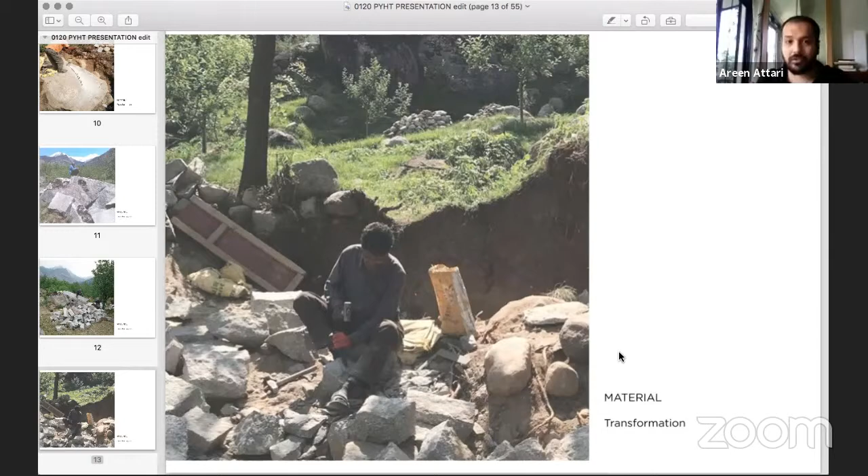So what we did is we actually transformed these stones into something like this. You'll see these chunks, and then they become a little smaller over here, and finally they become building blocks. So we were taking material from the site itself, using whatever we found in that region, in that place, and building with that, right? So we're trying to create a sort of genuine, authentic, and honest architecture that's for that region and from that region.

So these are the kind of discussions we have on site. That's the clients, that's the landowner, and that's me. A lot of times we do a lot of planning, as you can see here, but then we go back and we realize, okay, this is not working on site, and we have to change a few things, or we have to adjust. So the site sometimes talks to us, like the site communicates with us sometimes. Okay, this is not where I want this, or this is where I want that. So you have to listen and you have to be tuned in to these things.

This is a sort of layout of the space. There's 2 rooms here, another 4 rooms here, and you can see this is one big boulder. Where my mouse is right now, it's one big boulder.

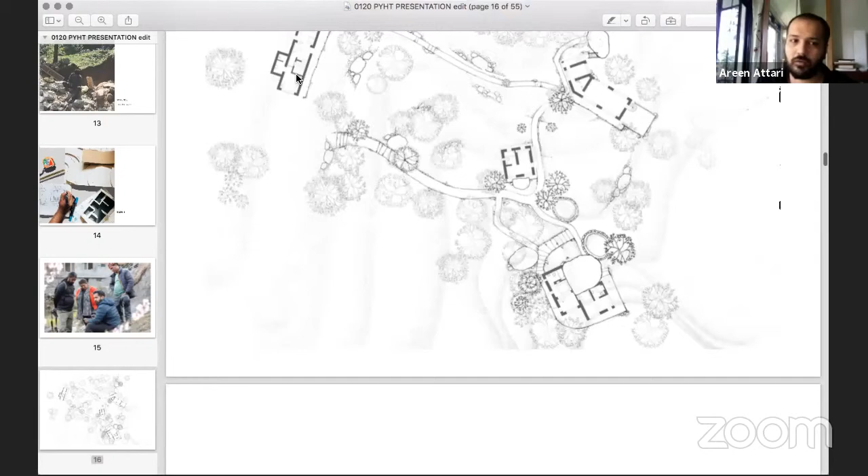So we actually wrapped this structure around this boulder. So instead of walls on this side, we actually have the boulder itself. Okay, and there's a dining hall and a kitchen area here, and the owner's home is out here. So I'm just going to show you a little bit more about how we wrapped around this boulder.

So this is one of the boulders that we did not break down, because the whole idea is to not just go and smash the site completely into pieces, but to do it with responsibility and with a little bit of authenticity. So we retained this huge boulder, and then we tried to keep all the trees as far as possible. Even the smaller ones, I think only 2 of them had to be transplanted because there was really no place to build in, and I think one of them survived and even bore fruit.

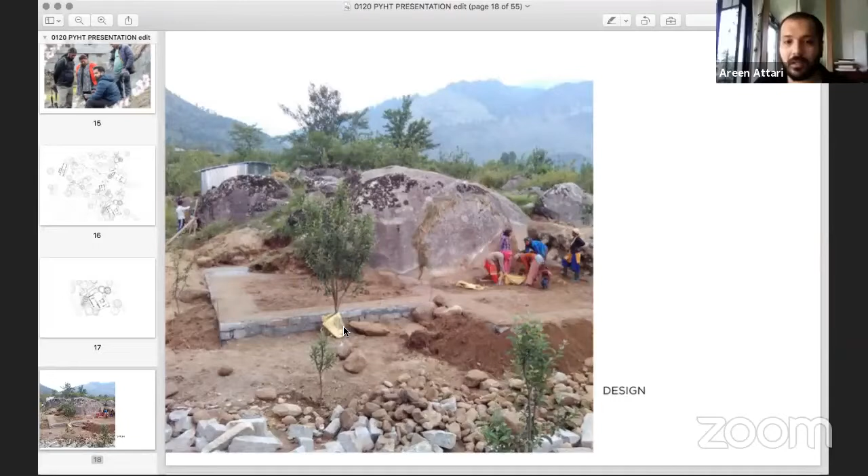So you can see we've gone quite close to this tree, but we took care of the roots, sort of wrapped around this boulder, and now you can see the walls coming up. They're really thick 18-inch stone walls. Okay, so when I say 18 inches, like 1.5 foot of wall that acts as thermal insulation, and so it keeps the cold out and doesn't let the cold come inside.

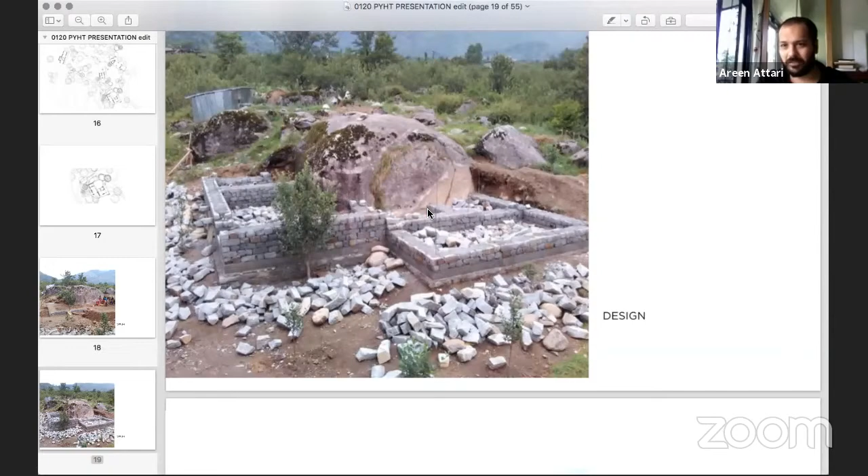And so with this particular boulder, the ground floor was here, and the walls you see of the ground floor are part of this. And then when it came up to the first floor, the top of this boulder acted as the entrance to the first floor. Okay, so we got like a double use from this boulder, and it was the height. So now this is the same structure. So this is like a before and after when the walls have come up.

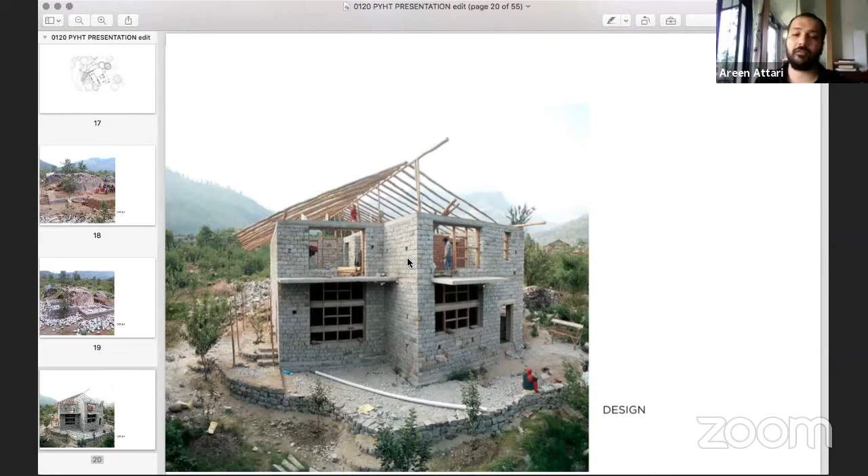And we try and make the most of the climatic conditions. So most of these big openings that you see are facing the south. In the northern hemisphere, the sun goes from east to west via the south, especially in winters. It moves slightly towards the north as we come towards the summer, but in the winters it's quite inclined towards the south. So we try and trap in that heat as far as possible.

Yeah, then this is a little further, the same sort of structure, and now this is it from the other side. Okay, this is the same structure from the other side. This is the entrance, and this is the boulder. So the land is so contoured that we've sort of hidden these spaces in there. So when you're walking towards this, you don't realize that it's ground floor also. It almost feels like, oh, that's a basement. So we try to play along with the existing land, so you don't have to do any cutting and filling of the land. You try and maintain the way it is, try and retain the way it is.

This is another structure. There are two rooms here, the ground and first. And then we try to create these fun things over here. So where my mouse is, this is a small little balcony actually. And the one beside it is also a balcony. They're actually not connected to each other. So this is a balcony for just one person maybe to come and stand, but the access to this balcony is from the bed. Okay, so there's a bed and then there's a window, and you have to climb from the bed into the window, and you can sit on the window and just put your legs out, or you can jump out, and the view is fantastic.

All right, the view is of Rohtang. If you've been to Manali, if you're familiar, it's the northern mountains over there. It's beautiful. And then the balcony on the right, there's actually a door, but that's from the shower. So if you feel like it and if you have some guts, then you open that door while you're having a shower and just enjoy the view. So we try to create these fun things as well.

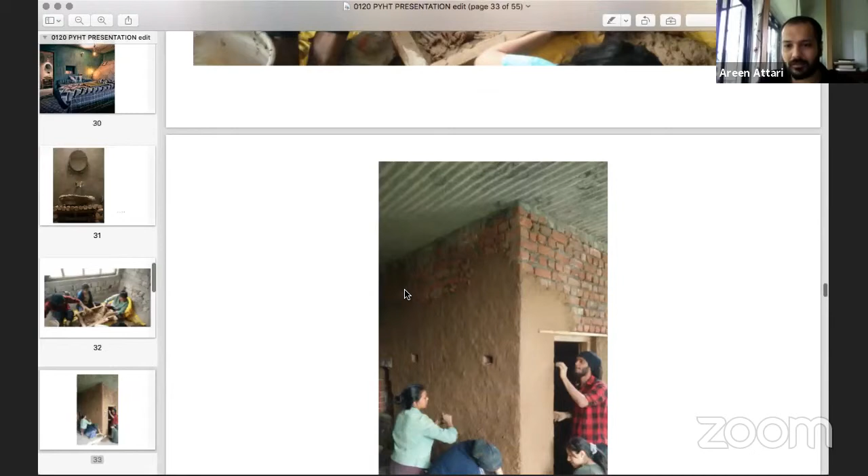We do workshops. What we always try to do is involve the young people who want to learn how to build with their hands. I feel there's a lot of people now who are really tired of the way things are. They want to learn how to build themselves. They at least want to get their hands dirty. So we try and plug in workshops with our existing sites. And so this was a workshop we did on mud plaster. You can see our participants doing mud plaster. And if the workshop is successful, then we leave it as part of the site, and most of it is successful.

And then we made a pizza oven again with mud. It's a technique called cob. So you can see people mixing it and turning the mud, and then you sort of stomp it for a while, and then you make balls like atta, and then you stack them on top of each other with a hollow part in the center, and then you have amazing handmade pizza.

Yeah, we must go to Manali. Okay, so

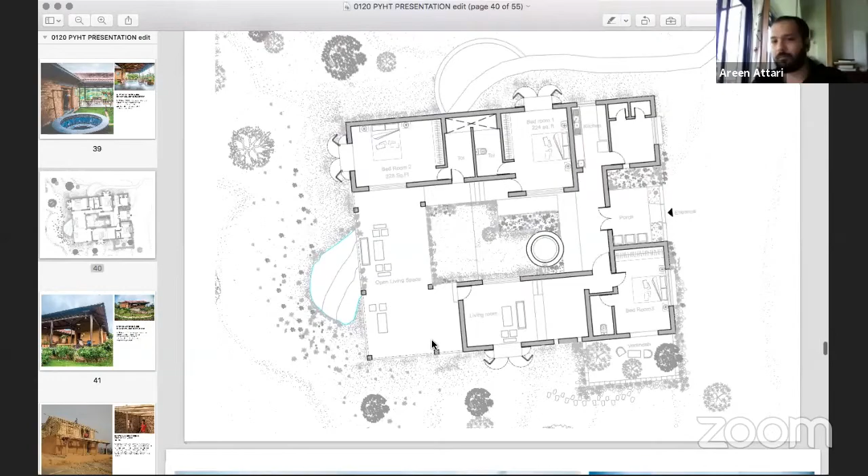Now, a lot of people, when they ask us that you build with mud, they're really worried about flooding, and they say, what about the water? Does it survive? Does it have long durability? I tell them two things. One thing I tell them is that the Great Wall of China, part of it is built in earth. Okay, and it's survived a long time, and you can see it from the moon. So it's a good testament to building with earth.

And the second thing is this project actually, the last monsoon. So the property is very close to the river Bhadra, and last monsoon it rained so much that they had to open some dam, and then overnight this whole place flooded. There were around 6 feet of water, and it stayed for around I think 8 to 12 hours. And we were really scared, right? Because you don't want any floods to happen in any structure, let alone an earth structure. But we were a little worried.

But we had also done something called a wet strength test. We had tested, and we knew that these blocks would last for 2 days without any problem, completely immersed in water. So this structure actually proved that, and there was minimal damage to the walls. In fact, no damage to the walls. There were some electric problems. There was some loose furniture that was all over the place. A lot of trees and crops died, but as an earth building, it survived really, really well. So it sort of breaks the myth that earth buildings are not strong and they cannot last.

The temperature difference in these earth buildings is also phenomenal. So mud, in general, as a material, has a high absorption rate of humidity and a high desorption rate of humidity. So it can absorb fast and also let go fast. And this helps a lot in temperature control. So it could be really, really hot outside, and these nice thick walls provide a fantastic climate difference. We measured once and it was, I think, 7 degrees, and we need to measure it over a longer duration.

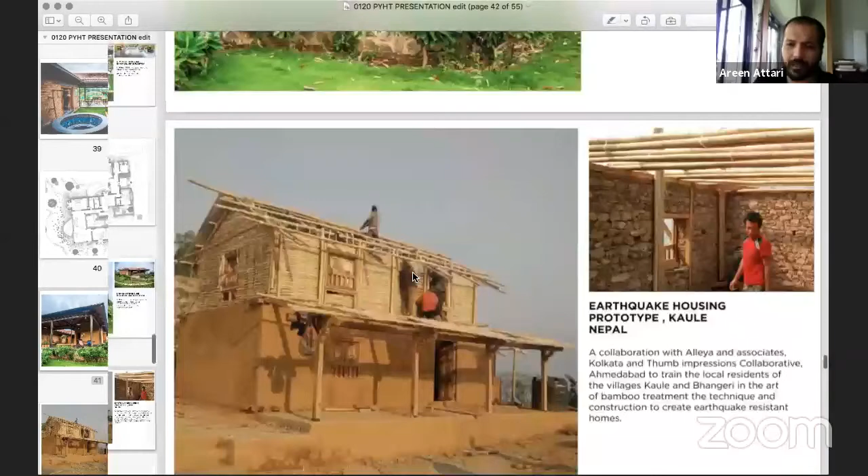I'm sure we'll find a higher temperature differential. And 7 degrees, without any air conditioning. There's no air conditioning, there's just a fan, but even the fan was not on when we measured.

This is one of the projects that we did in Nepal. We did it with two other organizations called Thumb Impressions Collaborative in Ahmedabad and Surat, and Alleya and Associates were the chief architects, and there's architect Sharan Lal. So they were a group of trekkers. They would go with guides from this village, and then they decided that they need to do something for them. So we did a training program over there. We taught them how to build with bamboo, and at the same time we built a prototype out there.

So I spent around 2 months in this village. Fantastic, beautiful people. I was living in a nice village house, eating local food every day, and also the local alcohol is really nice, which they brew themselves.

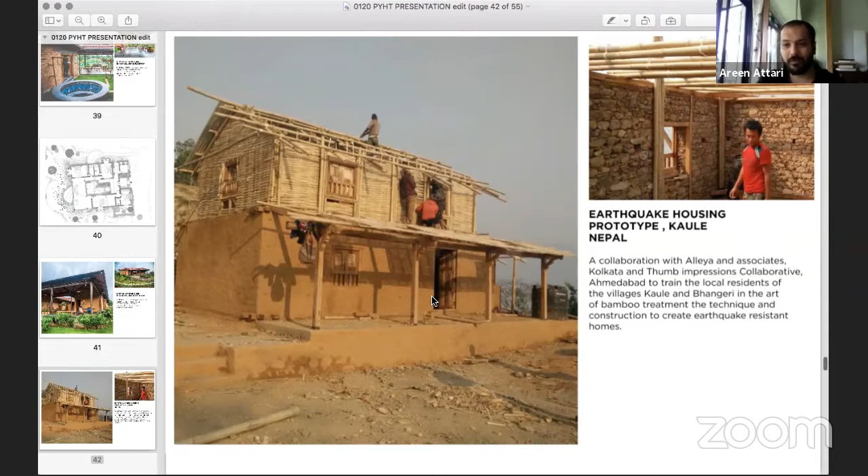And so the bottom half of this building, if you see in this photo over here, is actually the same technique that they use, which is stone and mud mortar. And then we added a few things. So we added these bamboo columns, and then everything above on the first floor is made out of bamboo. Now, bamboo, if you use the correct species, the correct treatment methods, can also last for around 30, 40, 50 years easily with minimum maintenance.

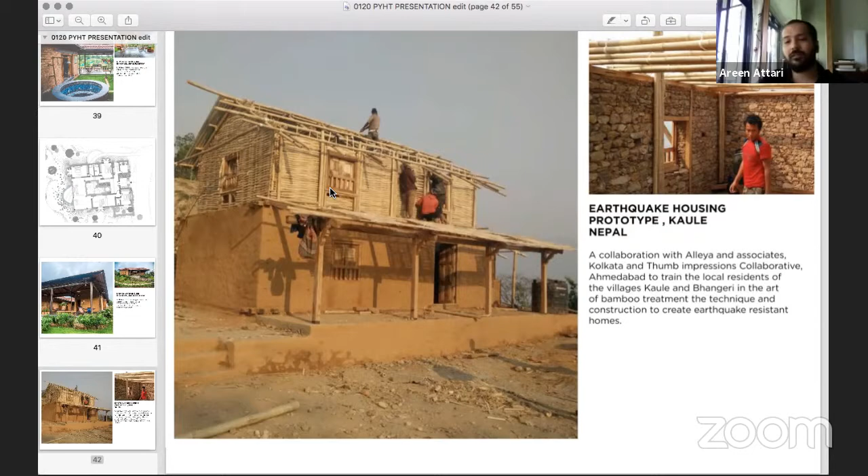So the whole idea for the first floor being bamboo is that it's super lightweight. Even if the bamboo falls, there won't be any fatalities. So it's really, really nice structure. It's also a little flexible, so it helps a lot to resist these movements in an earthquake and sort of stay back in its place.

And we got the whole community there to work on this project. Everyone you see here working, they're women, they're men, they're from the community. We trained some unskilled labor on how to work with bamboo, so they became skilled labor. So you build capacity in that way. So now they can go to places as bamboo craftspersons.

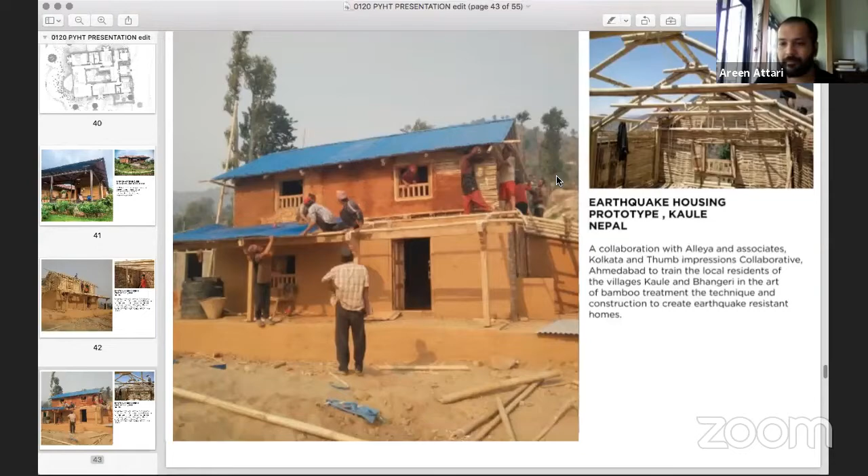Okay, one of our first projects is in a place called Neral. It's in a place called Sagunabag. It's an agro-tourism center. We built this mud house, as they call it there. We call it the adobe house because that's the technique. So adobe is basically sun-dried bricks, not compressed. It's loosely packed bricks that they generally burn to give you the burned brick, but it's not burnt. And we don't use the topsoil. We use subsoil, so it actually doesn't do too much damage to the environment. And then we build it with this raw brick, and again, nice thick walls, excellent thermal comfort.

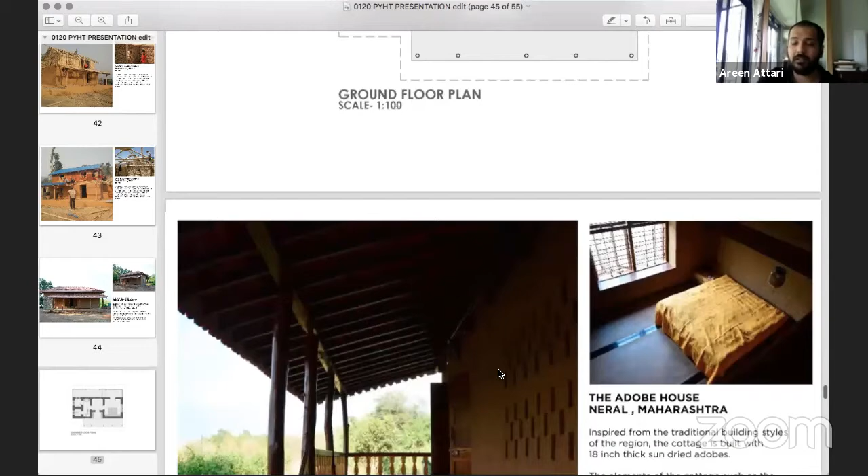This particular house is meant to be a comfortable rural house to get people from the cities to understand what it's like to live in a rural area. And it's overlooking a lovely pond that they've made over there. You can visit it hopefully post Corona times. It's a really nice place actually. You learn a lot about just how agriculture is done. And I think a lot of times we have no idea. We eat all this food, especially people in the city. So it was really nice to do something there.

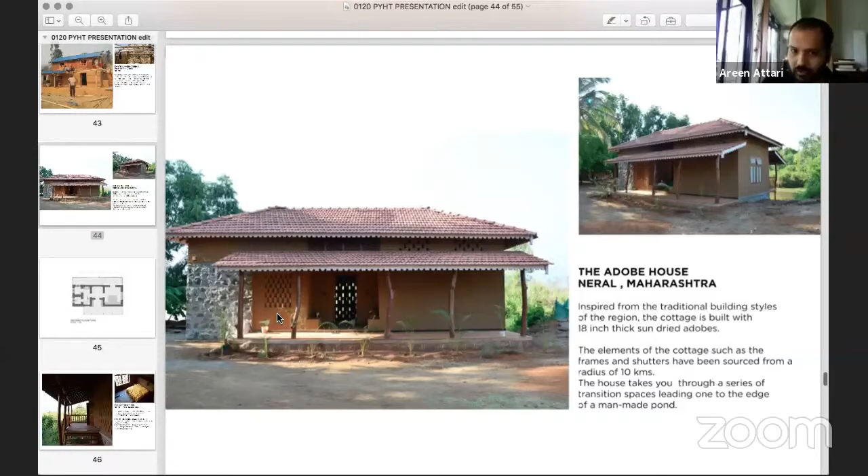Sorry, I'm just going back. All the terracotta tiles on top, Mangalore tiles, they're all recycled. We've put a stone wall in the part where we felt we're going to get most amount of rainfall, from the southwest. It's also our toilet and bathroom blocks. So wherever there's water, we put a stone wall. All the wood that you're seeing here is from their farm itself, grown specifically so that they can use it as timber in construction. The window that you see over here is again an old recycled one that was in their warehouse that we sort of redid. All the flooring over here is terracotta tiles, so we're trying to use all our materials really, really sensitively.

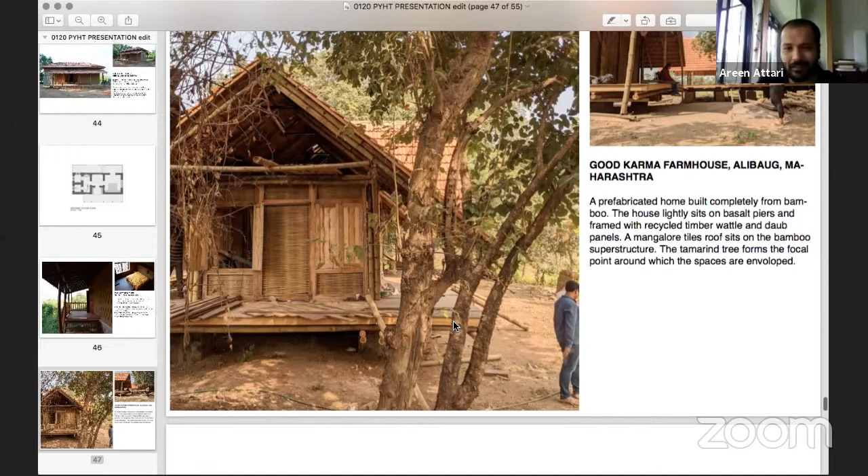And the cyclone just hit this and we were a little concerned about what would happen. We anticipated a few tiles coming off because the bamboo, as I explained before, even in an earthquake zone, can vibrate a lot and resist a lot of these movements, and it'll come back into place. But that vibration may cause a few of the tiles to displace. So we got a photo from our collaborators on site, and it showed that some of these tiles had been lifted off, but that's minimal damage actually. So really, it's a really good thing.

This is how it is from inside. All the wood you see here, on the windows and on the floor, is all recycled from ships. There's one place in Bombay called Darukhana, where they used to break down ships. There's only one shop and one godown, I think, that still exists and still has a lot of this old ship stuff. So we recycle all of that and use it. I don't really know how old these pieces of wood are. They've traveled all over the world, and now they're part of our structure.

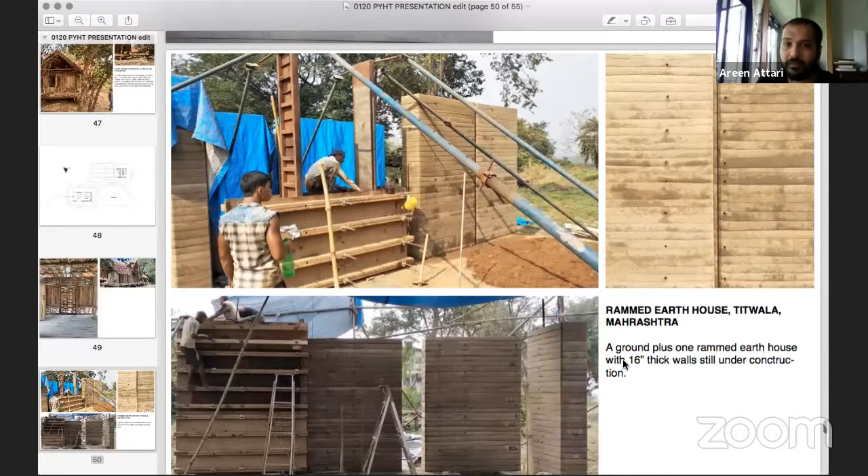So we really try to source environmentally friendly materials all around. And if you can't source something naturally, then we try and use upcycled and recycled stuff.

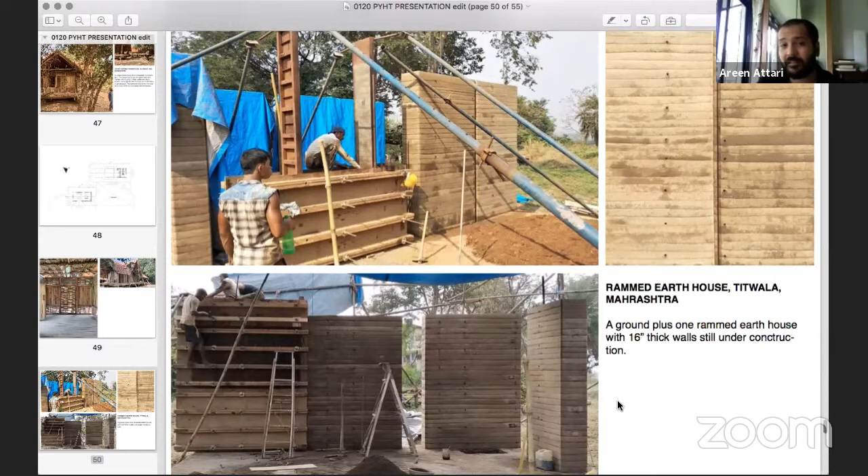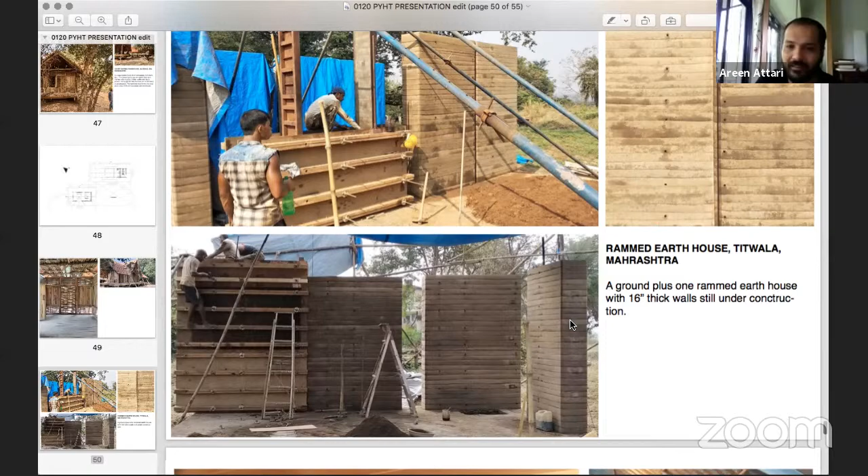This is a second house in a place called Titwala, very close to Khadavli, near Bombay. This is a system called rammed earth. We make these shutters, and then we put in earth, again maybe 5% cement, and then we compact it with a rammer, really compacted, to make these thick walls, 16-inch thick walls, and they look really beautiful. They look like cake. I promise you, if you see it when it's fresh, you'll want to slice it and eat into it. But don't, because I don't know what will happen.

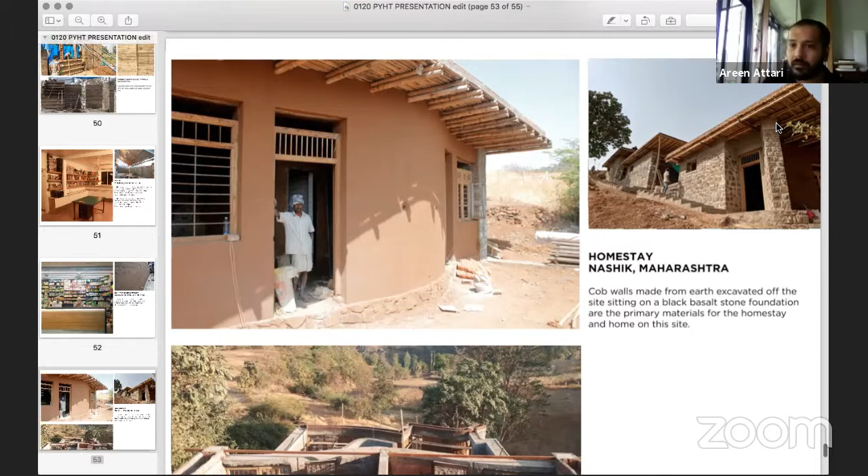All the stone that you're seeing is either from within 200 meters, there was a local quarry, or there's an old house in Deolali that was broken down, which is very close by. You can see them here. They're all these different colors. They're the cornerstones. So we just bought them and brought them here.

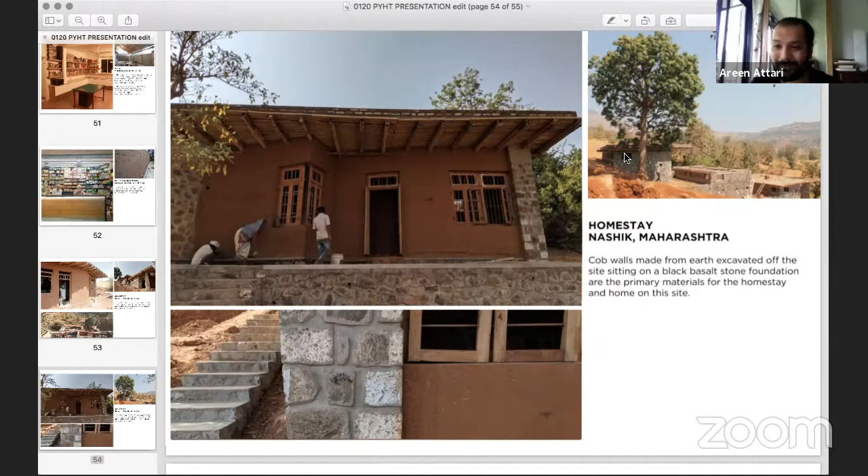And you can see the green roofs over here. I recently went on Google Earth and I really couldn't find this structure beside this tree because it was camouflaged with the greenery. So I was super happy with that. And yeah, that's about it from me in terms of what work we do and why we do. And now I'm happy to have a talk, and maybe if you have a few questions, answer them.

Okay. So there are some questions. I also have a few questions. Awesome. Okay. So someone is asking about when you were talking about the balcony outside the bathroom. Someone was a little inquisitive to say, why would the balcony be with the window outside the shower?

So actually we had balconies on both sides. There's a balcony on the south side where you can sit and have your breakfast and enjoy, and that's your primary balcony. But we thought it would be really fun because the view on the north is really something else. The south, you see the valley, you see Manali, you see Vashisht, and you see the distance. But in the north, you just see mountains and nothing else.

And so we thought that maybe you don't have to open it while you're having a shower, but maybe if you're brushing your teeth, you want to step out and enjoy nature. You don't get this opportunity, and we thought of just creating something fun and interesting there.

Okay. And then there's a really interesting question. Do the compressed mud blocks regain their original strength on their own even after being exposed to excessive water, like in the flood? Yeah, they don't lose any strength. The moment the water dries up, they go back to their original strength. Maybe just a small percentage of loss would be there, but nothing major.